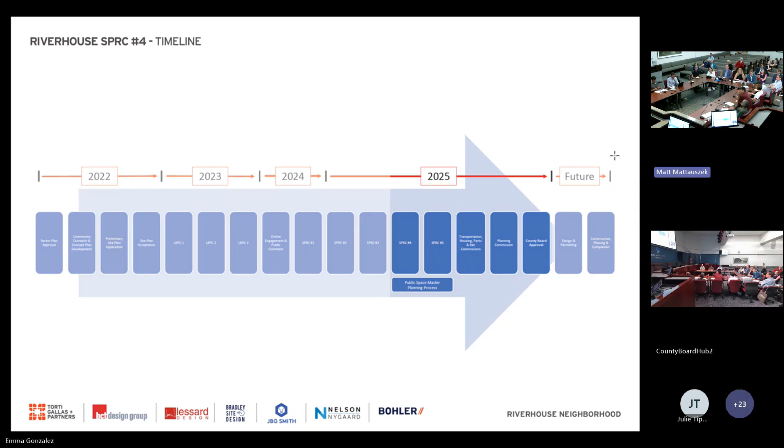My name is Kedrick Whitmore, and we're excited to bring you our proposal for the RiverHouse neighborhood. You'll see an overview of the topics we'll discuss this evening. We've been at this for quite some time since the adoption of the sector plan back in 2022.

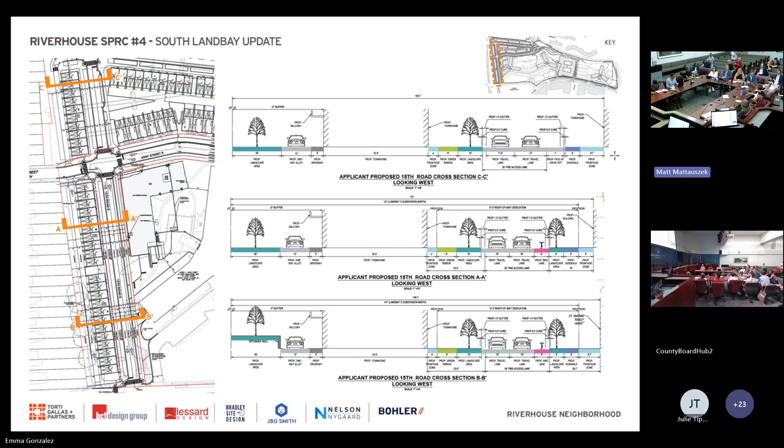The next slide is the C1 building. We heard comments at the last meeting that the architecture needed more variety and a better definition of the base, middle, and top of the building. In response, we've made revisions to the architecture, including refinement of the parapets and changes to materials and colors to help set off the base, middle, and top areas.

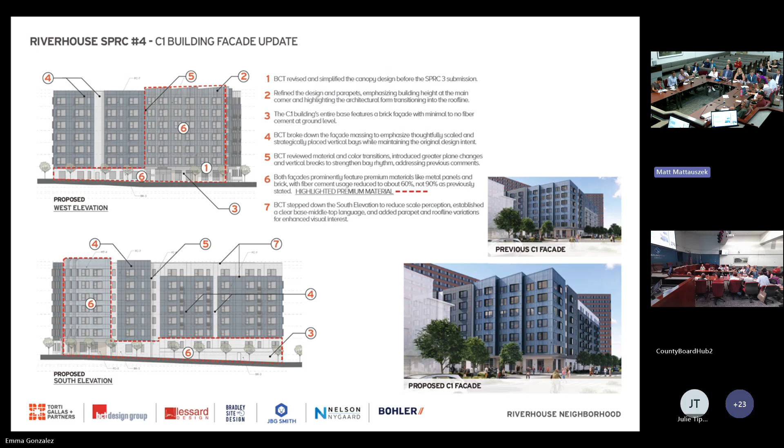On the right side, the top shows the previous facade, and the bottom shows the new proposed facade. We've outlined the changes here, 1 through 7. I won't go through them in detail now, but we're happy with how these revisions have really helped the building. With that, I'll turn it over to Belle to discuss the green ribbon.

Thank you, Ked. I am Belle St. John Day, and tonight I'll speak on the green network design found throughout RiverHouse, focusing on the green ribbon and open space. You can see the map presented in the Pentagon City Sector Plan showing the flexible placement of the green ribbon with key connections noted in the gray boxes.

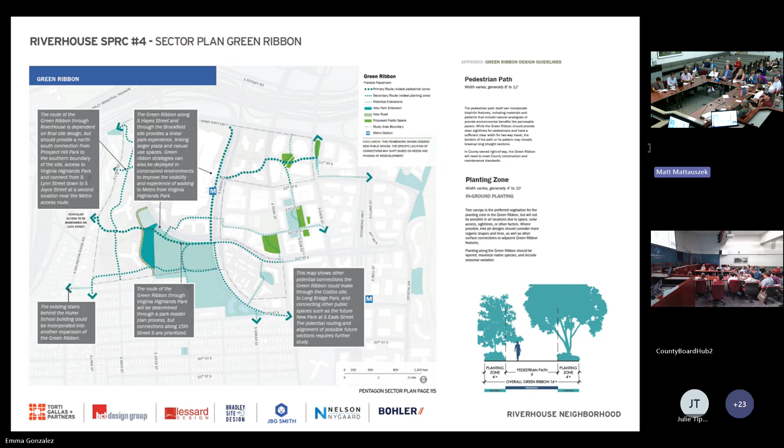More than 3 miles of new walks is diagrammatically shown, with approximately 1 mile of new paths indicated for the RiverHouse site. The design team created the section shown as a visual of the standard green ribbon profile as directed by the guidelines, with a typical overall width of 16 feet and a clear path ranging from 8 to 12 feet.

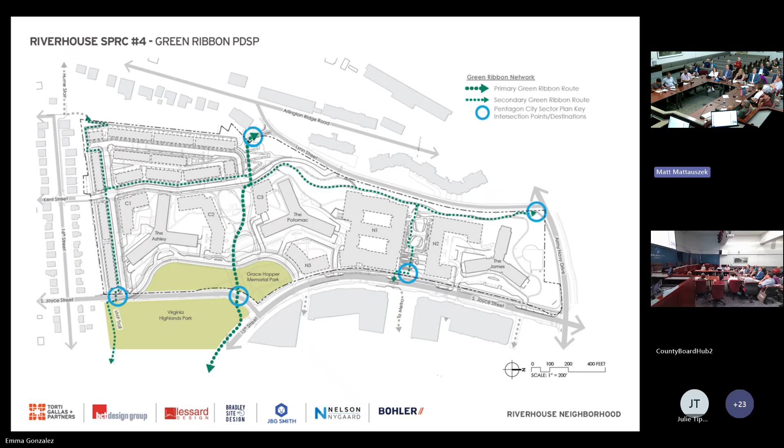Next you can see a diagram showing the full future RiverHouse green ribbon network, with key intersections and destinations from the previous map highlighted using blue circles. The placements have been adjusted per coordination and feedback heard thus far, along with utilizing creative solutions to provide ADA accessibility across the RiverHouse neighborhood. The design intent is to create clear connections to nature and native plant corridors through an inviting and safe experience.

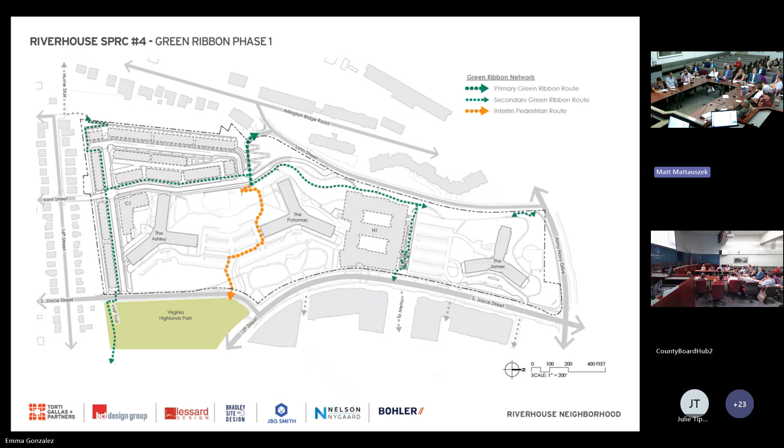Due to the size of the site and the significant length of green ribbon provided throughout the RiverHouse site, there are several typologies found. Starting at the south end of the site, you can see the secondary green ribbon placement along the front of the townhouses. This is on the new Fifth Road looking west.

The alignment along the townhouses provides a variable width path and tree planting strip to provide the organic form as described by the green ribbon design guidelines. Opportunities for path lighting and casual seating will be accommodated with the variation in widths.

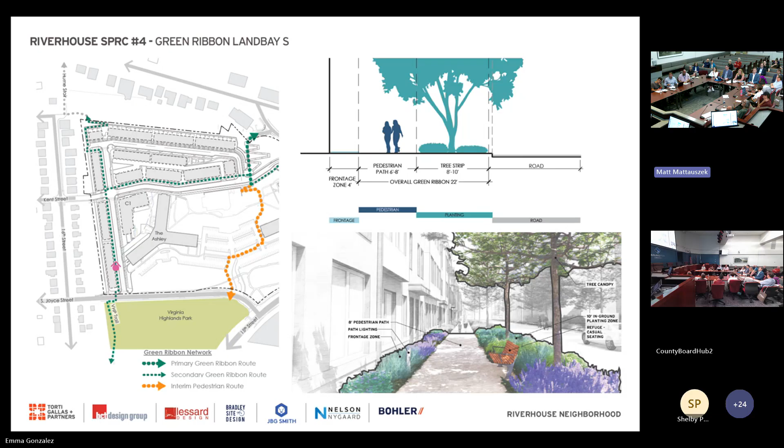This is a similar condition found along Kent Street, which currently shows 14 benches spaced throughout the length, and this will have a similar dimension. Periodic breaks in the bioretention planting are also included to meet the needs of access to the street.

On the next slide you can see the condition of the primary green ribbon at the 15th Street spur, where the 28 feet of grade change is accommodated with a wide staircase. The biophilic principles of the green ribbon are also met by splaying the accessible access ramp to nestle within native plantings and work with preserved tree canopy.

Landings provide opportunities to capture the view towards Virginia Highlands Park. We have been exploring the additional 22 feet of grade change up to the intersection of South Lynn Street, but the ADA solution would not meet the principles of the green ribbon per the sector plan.

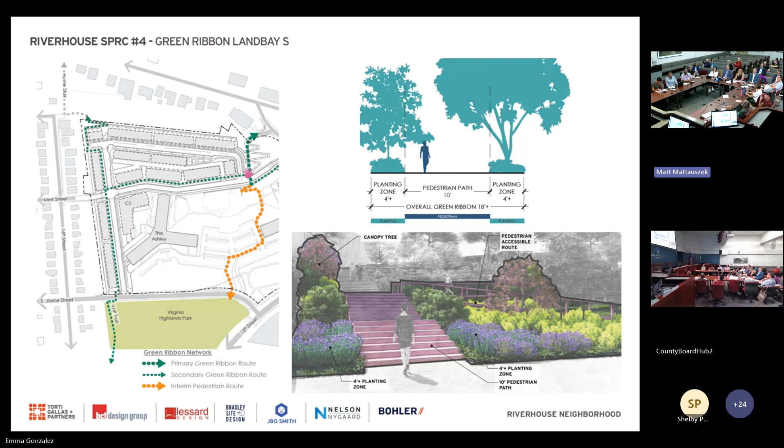The next slide shows a plan view of the interim condition, met by utilizing existing pathways and creating or enhancing existing pathways where possible to provide the full 8-foot width and accessibility.

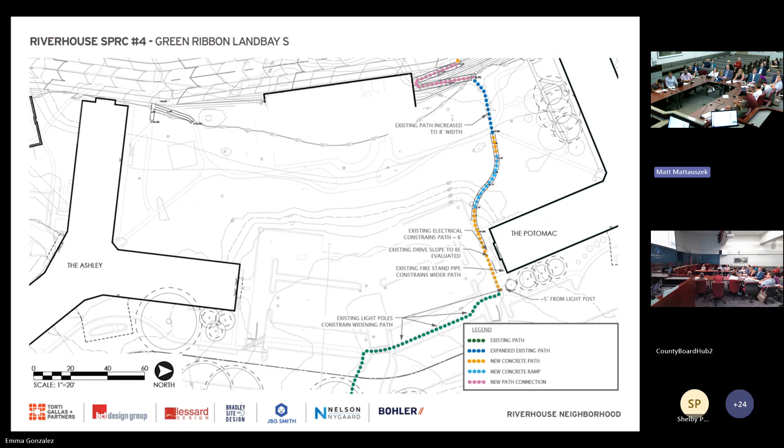As we go to the next slide, we move farther north into the site to explore the green ribbon typologies found in that area. This example at the N1 interim space is subject to the park master plan process beginning shortly, showing a 35-foot dimension for the green ribbon.

With the 35 feet of dimension in the space, the green ribbon can be easily accommodated in the first phase to provide clear access, plantings, casual seating, and wayfinding.

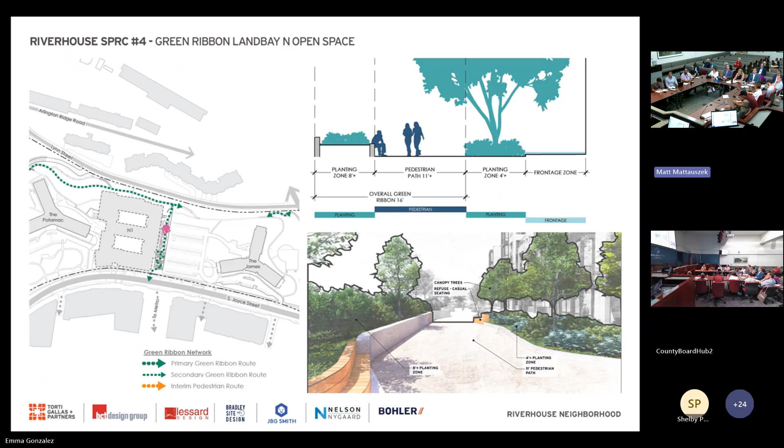Going to the next slide, we are along the west property line looking south next to the N1 building, with South Lynn to the right.

The green ribbon pathway responds to the existing naturalized condition in this area with a native plant palette, utilizing walls and freestanding benches for casual seating opportunities, with pathway alignment organically laid out to preserve trees.

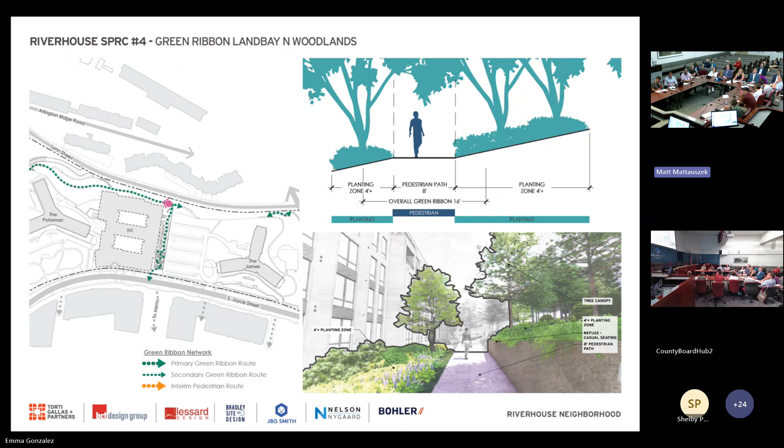The next slide shows how the green ribbon responds to tree preservation, surfacing when the naturalized setting becomes more dense with existing trees to remain and extensive topography.

This view is looking south again along the green ribbon near South Lynn Street at the corner of the new N1 building, looking behind the Potomac. You can also see a bit of the access up to South Lynn for the bus stop on the right side of the screen.

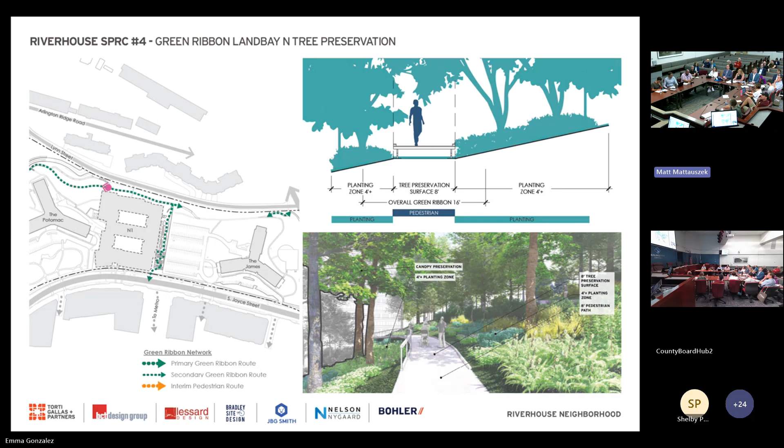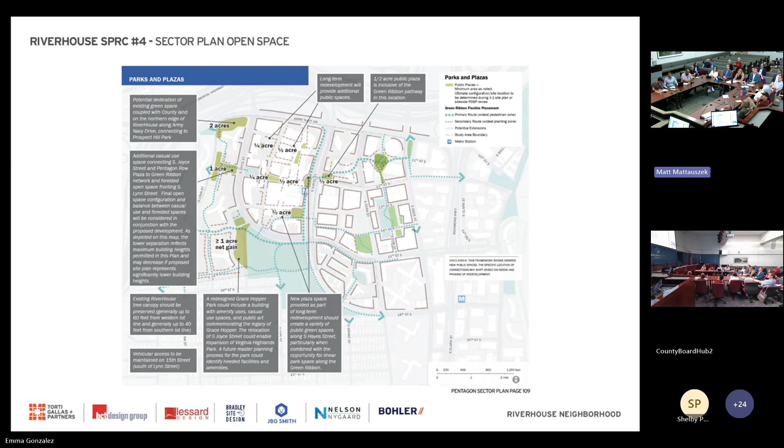Now we're going to shift into the open space designated for the RiverHouse neighborhood. On the next slide, you can see the diagram indicating the 4+ acres prescribed for RiverHouse by the Pentagon sector plan, the city sector plan.

The next slide shows how the full RiverHouse green network is being planned for, with both the PDSP planned open spaces and utilizing the green ribbon to connect them. The following slide focuses on phase 1, with the delivery of nearly 75% of the green ribbon planned for the RiverHouse site and the interim condition found at N1.

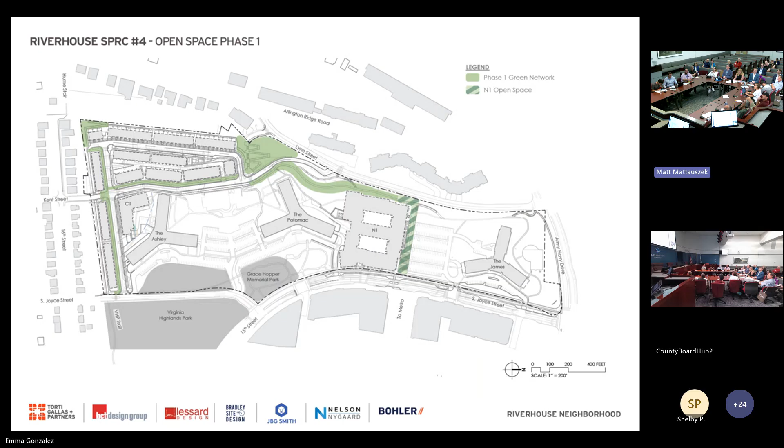We zoom in on the next slide to the conceptual plan showing the interim condition that will be built with N1. Priority was given to the creation of the green ribbon in the first phase, accessed through a universal design approach. The individual dooryards with associated circulation for the N1 residents are outside of the dedicated open space dimension.

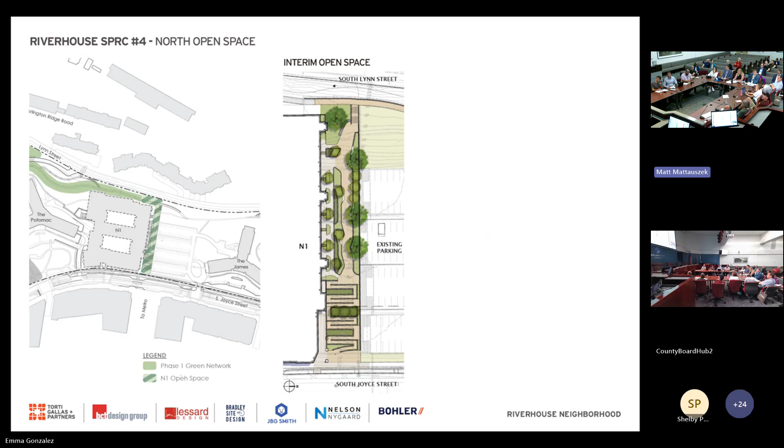This increases activation and a sense of community that can benefit the open space. Seating opportunities are woven throughout to promote rest, safety, and casual social interaction. This view is shown at the top of the stairs from the west, looking east towards West Post.

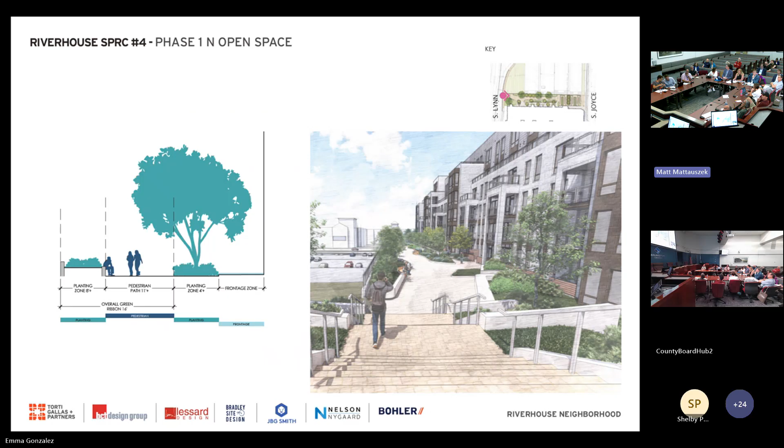Sightlines and view sheds are carefully considered for safety and orientation. Dooryards are areas that activate the space and support CPTED principles by keeping eyes on the space 24 hours. On the next slide, you can see the prescriptions laid out for the RiverHouse site for open space and green ribbon and how we are meeting those.

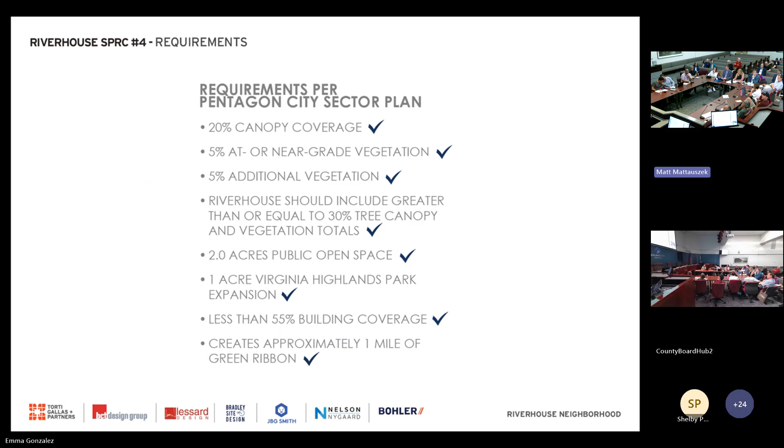I now welcome Chris to discuss transportation.

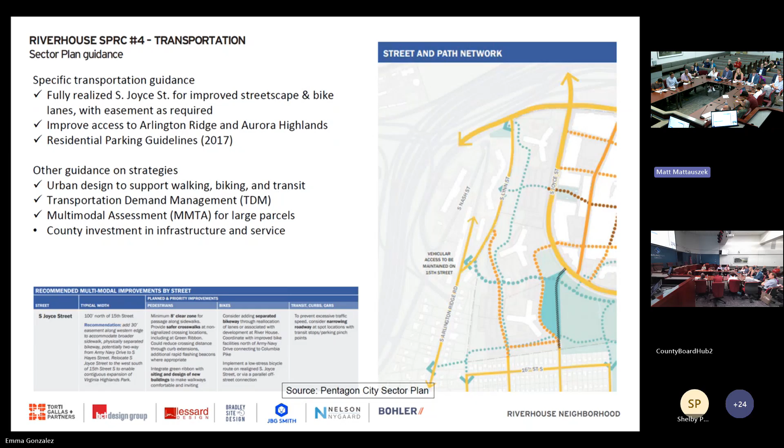Thank you, Belle. So tonight we'll be talking about some of the transportation design elements of the proposed RiverHouse neighborhood. Here you see sector plan excerpts from the Pentagon City sector plan at the right and at the bottom. Highlights include changes to Joyce Street that we're about to discuss in more detail, other multimodal infrastructure improvements, and more typical requirements for analysis and TDM.

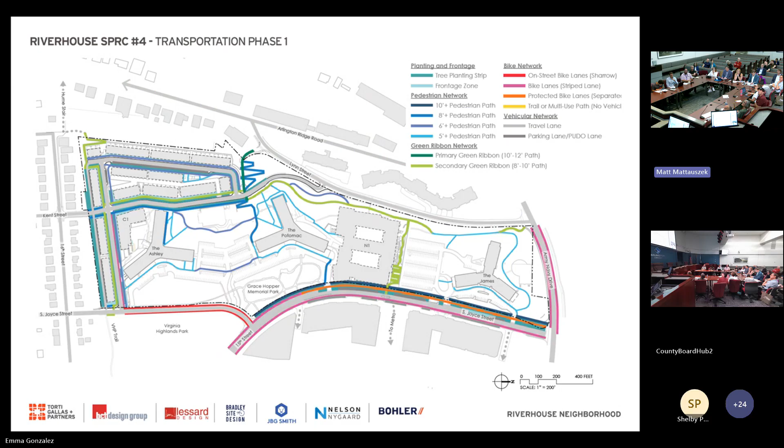It's the same elements as on the previous slide, but noting some of the interim improvements that Belle described as well. So on the next slide, you see the familiar Land Bay S view, which also includes transportation improvements to be delivered with site plan C1.

Belle talked about the green ribbon and to some extent the streets, but I want to highlight the formalized connections both to Kent Street on the south and Lynn Street on the west, which were encouragements of the sector plan.

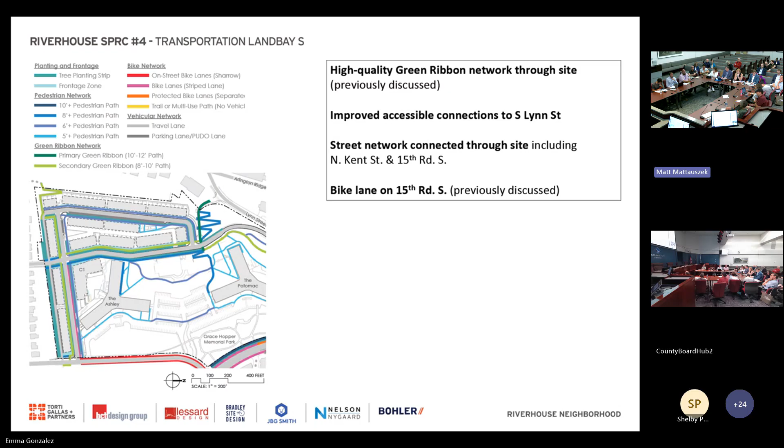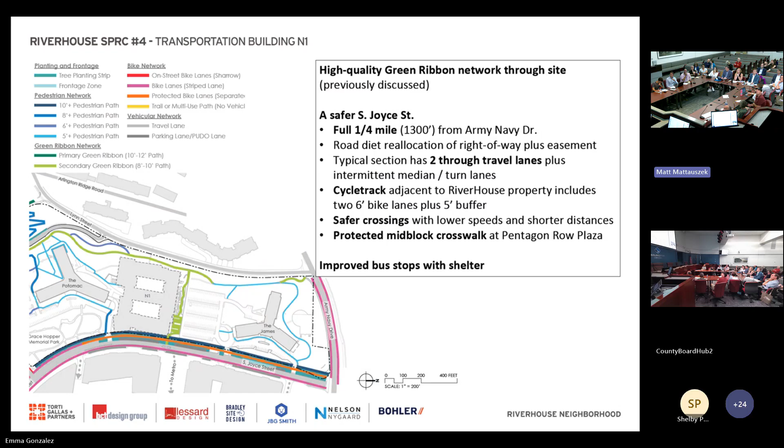On the next slide, we shift to building N1. The focus here is really on the transformation of Joyce Street. Site plan N1 delivers over a quarter mile of road diet on Joyce Street, including new protected cycle track, safer crossings due to lower vehicle speeds, and much shorter crossing distances.

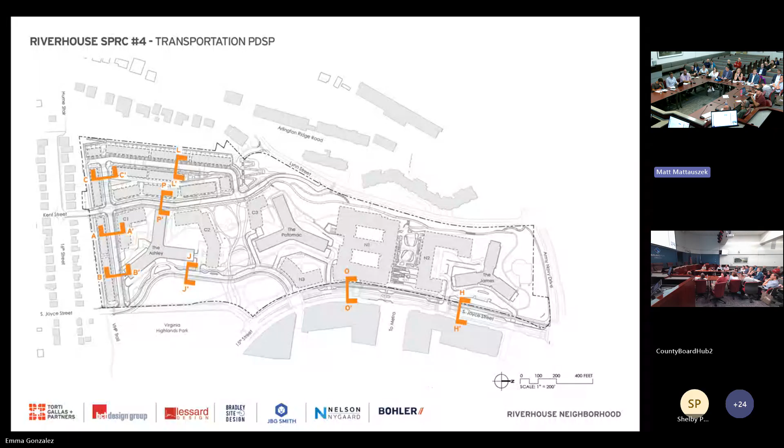Starting with the next slide, we will be walking through some cross-section views of specific streets, starting at the bottom right of this diagram, which is Joyce Street, and then proceeding around to the left of this diagram.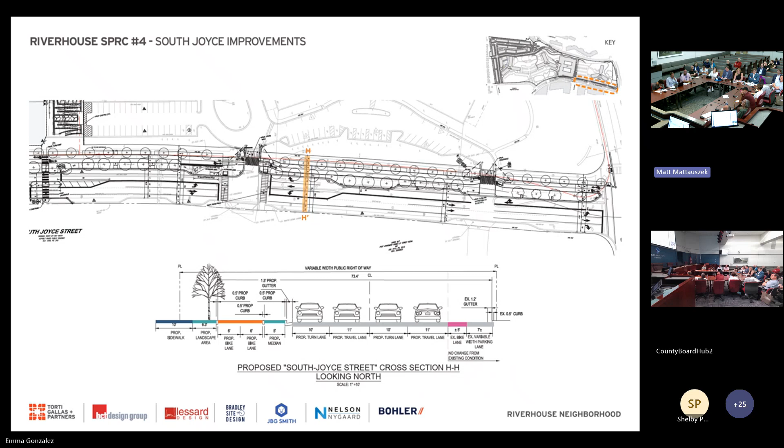The next picture is closer up to Army-Navy Drive. Again, from right to left in the section at the bottom, you see the existing parking and painted bike lane against the Westpost side, plus 1 travel lane heading north. In this particular segment, we have 3 travel lanes heading south, allowing for left and right turns, and then a buffer again before the 2-way cycle track, and finally the sidewalk in front of the existing RiverHouse building.

The next slide shows the relocated Little Joyce Street, as we call it, the segment of Joyce south of 15th Street, which is an element not of phase 1, but of the full PDSP. From right to left across the section, you see the expanded park space and then the proposed shared use path of ample width to accommodate people biking who choose to bike on the path, as well as people walking. Green elements, 1 vehicle travel lane in each direction. In this particular location adjacent to buildings, a proposed pickup drop-off space, and then green elements and the sidewalk against the building.

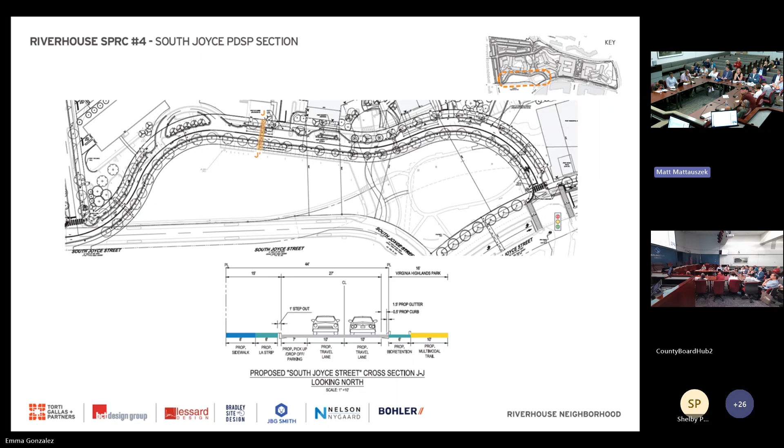The next slide shows even more information on one slide. This is 3 different sections along the proposed new 15th Road. Belle already talked about these at some length, but I'll just point out that in general, they contain 1 vehicle travel lane in each direction, plus in the 2 sections east of New Kent Street, a bike lane, and then on both sides, green elements and sidewalks.

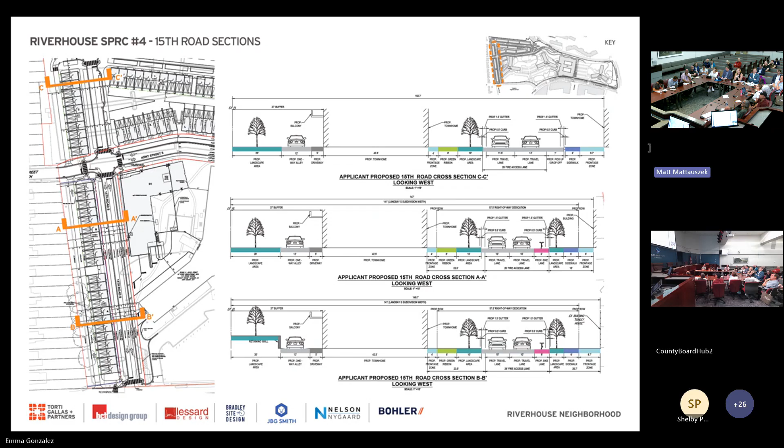On the next slide, you see the new Kent Street, so heading south on the left and north on the right.

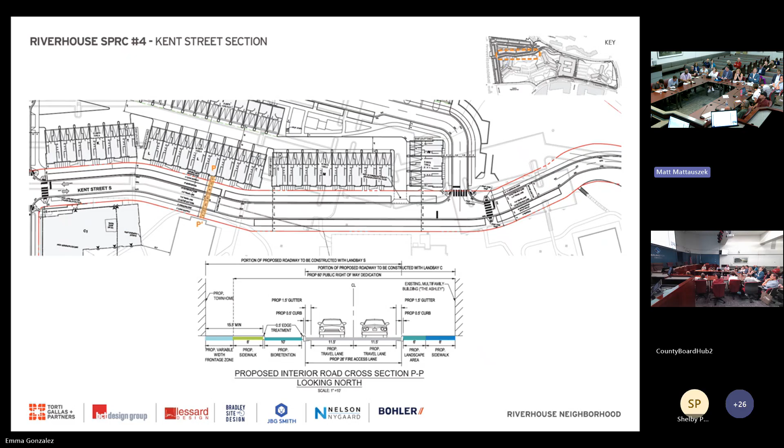It also has one travel lane in each direction, plus green elements and sidewalks. The Loop Road, in the far southwestern corner of the site, is also proposed to have one vehicle lane in each direction, parking along one side, and green elements and sidewalks.

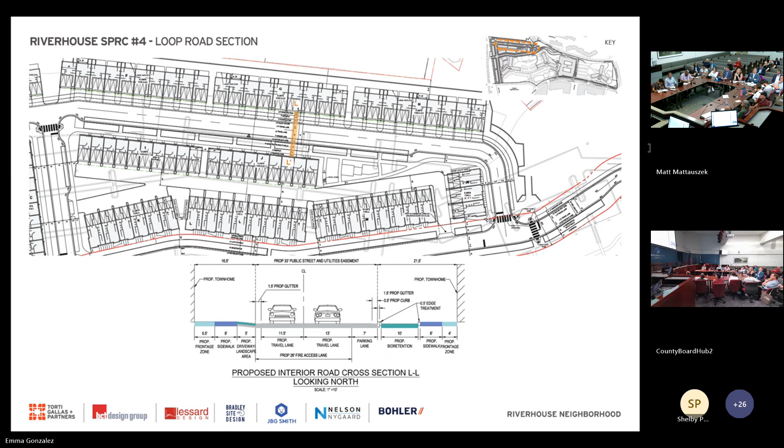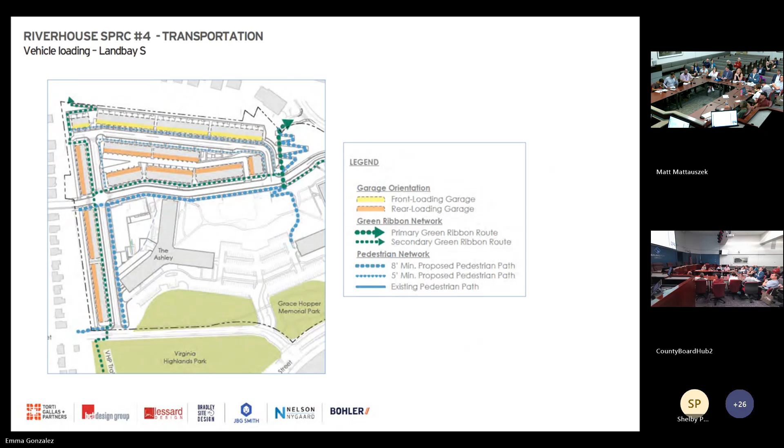The next slide shows parking and loading for Landbay S, highlighting where the garage entrances are for the proposed townhomes. You see mostly rear loading garages, except for the far southwestern corner, where due to topography they're front loading garages.

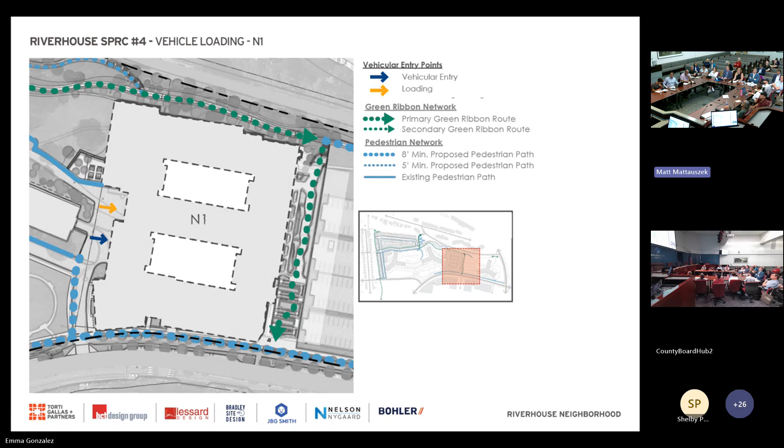On the next slide for building N1, similarly, the access drive comes off of Joyce Street and then provides access first to the vehicle garage in building N1, and then the truck loading.

In summary, phase one includes the delivery of nearly 3 acres of transformed Joyce Street with the road diet described, which is actually more than the building footprint of building N1 itself. That includes 1,500 feet of bidirectional two-way cycle track. Phase one is also delivering over 3/4 of a mile of green ribbon, which is over 1.5 acres of green ribbon space. I believe that concludes our presentation.

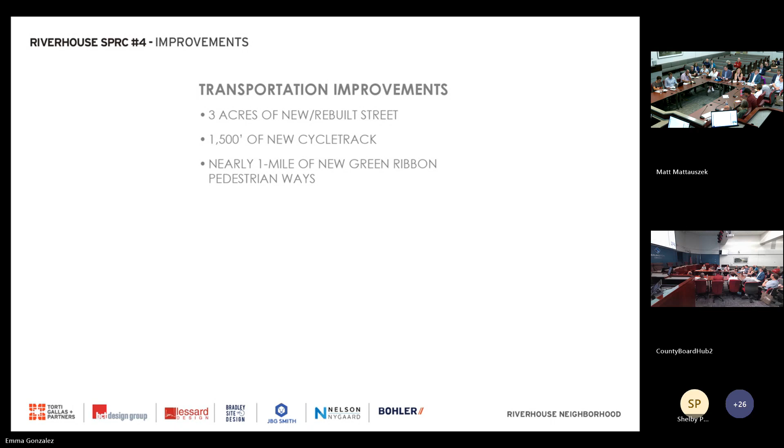While that loads up, I want to focus tonight's discussion on our three agenda topics. The first is landscaping and biophilia. The second is the green ribbon and how it all flows with the site together, whether it achieves the goals outlined in the plan. Third, we will talk about the streets and streetscapes. Those are the bounds for what we'll primarily be talking about tonight.

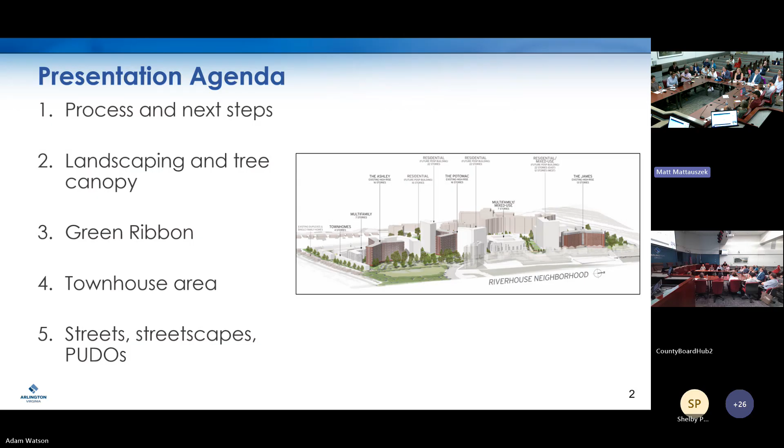I think Kedrick covered the process well at the start of their presentation. We are here on June 26th, this is our SPRC number 4 meeting. We plan to have one more SPRC meeting advertised for July 28th, so please make sure that's on your calendar. We'll send out more reminders before that meeting occurs. We'll be back here again in the county board room for that meeting, and online as well on Microsoft Teams.

As Kedrick also mentioned, we are planning to launch a public spaces master plan process for the N1 public space. That process will focus on the design of both the interim and final configuration of that public space between those two buildings. For tonight's discussion, please direct your comments to that online engagement for that space. We anticipate it will open on June 30th and run through July 20th. However, everybody on the SPRC roster or who already follows the RiverHouse project through our GovDelivery notices will get a notification when that process goes live, and there will be a project page for that as well.

Just a side note that the other two public spaces proposed to come with the RiverHouse PDSP overall will be planned via separate processes in the future. James Park, on the far north side of the site up by Army Navy Drive, would be planned through a similar process when we go through SPRC for the N2 building. And there's already CIP funding for Virginia Highlands Park planning in the CIP, beginning in 2032.

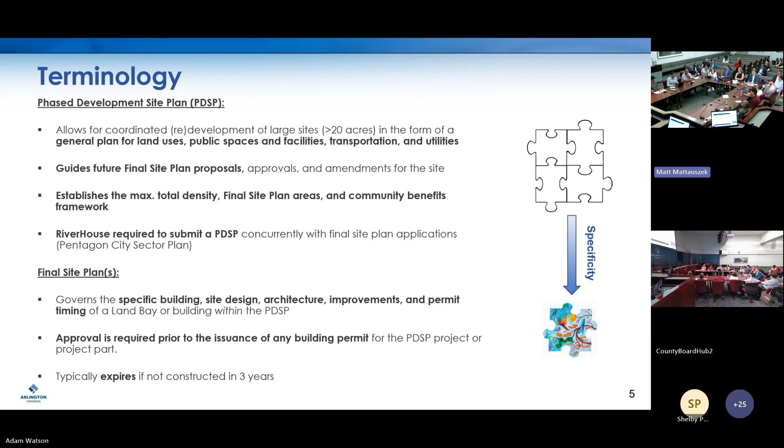It covers what the permit timing will be for when things are delivered for a land bay or building within the PDSP. Approval of the final site plan is required before the county can issue any building permit for the PDSP project or any project part. Typically these final site plans also expire in 3 years' time, unless there's a request to the county board to extend it, or the Virginia General Assembly extends the validity.

Now I'm going to turn to talking about landscaping and tree canopy. There are two major objective criteria in the Pentagon City Sector Plan that cover this topic.

The first is building coverage, shown on the left-hand side of the screen. The sector plan recommends that buildings take up no more than 55% of the overall PDSP site area from the 5th floor and below, and 40% above the 5th floor. This is exclusive of any area granted as a public access easement or fee-dedicated park—so you net out the green ribbon, for instance, entirely.

I'm pleased to say the proposal is well within these thresholds: 47% building coverage for the 5th floor and below, and 34% above the 5th floor.

Pivoting to the box on the right-hand side—tree canopy. There's additive criteria here for the RiverHouse site: at least 20% tree canopy on site, 5% at or near grade vegetation, and an additional 5% additional vegetation, which could be things like green roofs, getting you to a total of at least 30% tree canopy and vegetation on site, again exclusive of fee-dedicated park or public spaces.

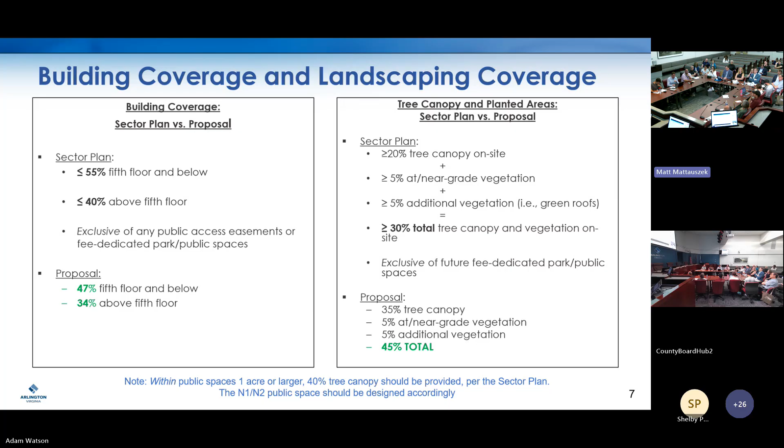The note at the bottom of the screen is something for everybody to think about when filling out the online engagement for the N1, N2 public space. The sector plan has a separate recommendation to try to achieve 40% tree canopy within these public spaces—keep that in mind as you fill out your online engagement feedback form.

Okay, so lastly, the sector plan talks about site edges and tree canopy zones around the site. It recommends that tree canopy should be preserved generally up to 60 feet from the western lot line and up to 40 feet from the southern lot line.

My big caveat on the 40-foot thing along the southern lot line is that the sector plan wants a 40-foot tree canopy buffer, development, a new street, and a green ribbon. I think we're acknowledging tonight that it's probably not possible to fit all of that in, given the existing Ashley building remains on the southern lot line. Knowing that, please bear in mind the flexibility needed for what has to occur in this very small space.

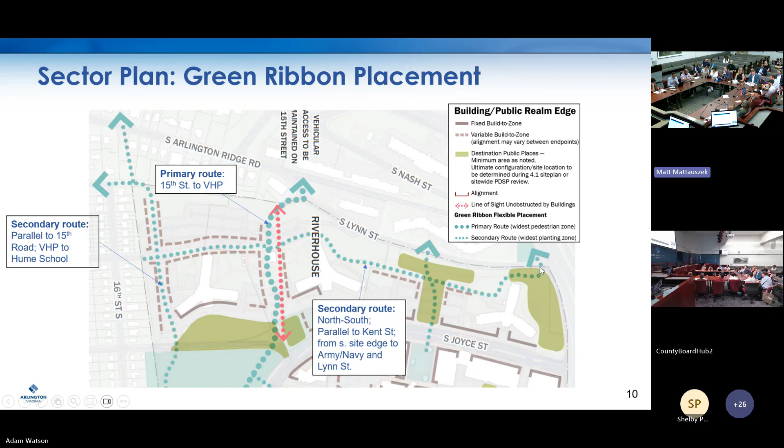The sector plan also has green ribbon design guidelines. I'm quoting the key quote from the cover page of the design guidelines: 'The most important design element of the green ribbon across all sites is the quality and the continuity of the connection, ensuring sight lines, the pathway, and the experience are continuous, easy to navigate, and visible.' It goes into much further detail on things like pedestrian path widths, planting zones, branding and wayfinding, tree canopy, planters, vertical elements, furnishings and refuges, and also lighting.

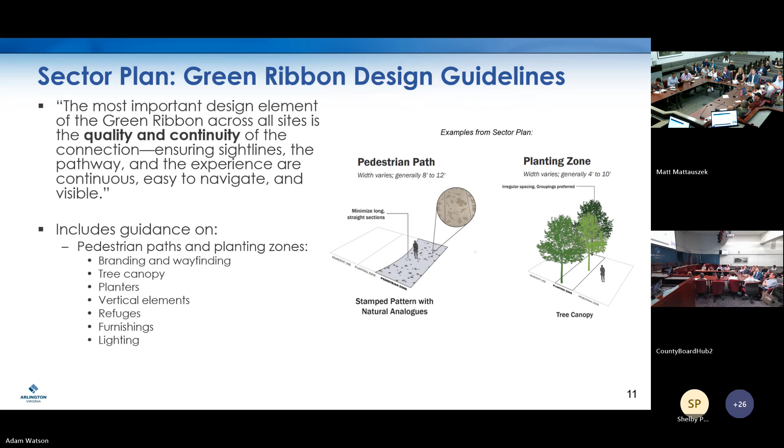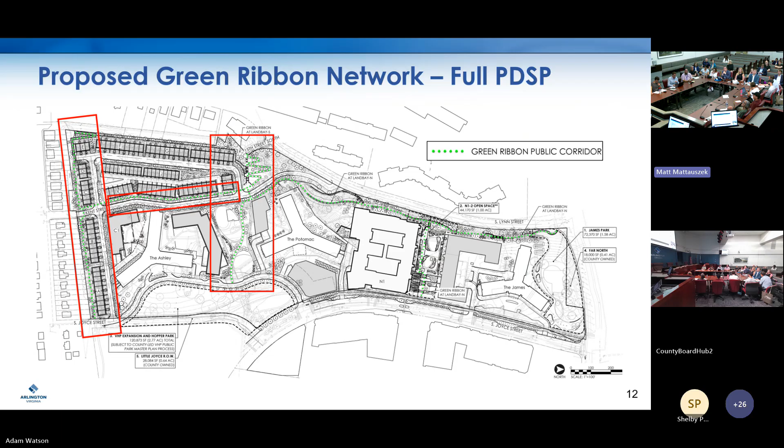So this is essentially the guidelines and criteria against which staff is evaluating the developer's proposal for the green ribbon. This is their overall green ribbon network. I think they did a great job walking through this. I'm just going to focus on a couple areas where I've drawn boxes overlaid on this map. Again, the first one is our primary green ribbon route that runs from the 15th Street spur down to Virginia Highlands Park.

As Kedrick and Bell mentioned, there will be an interim treatment of this routing in this segment of the green ribbon until either the C2 or the C3 building is constructed, whichever comes first. We've been working with them to make sure there's a way in the interim to get you from Kent Street down to Virginia Highlands Park. This interim path includes both new and existing sidewalks that vary in width from 6 to 8 feet and connect you down to VHP.

One thing that has come up through SPRC in previous meetings, again talking about the primary route, focusing on the segment from Kent Street west to the 15th Street spur — the way the applicant has proposed it, this does comply generally with the sector plan, as it is shown in the sector plan. However, we have heard from the SPRC concerns about the existing grade on the 15th Street spur and how one is going to connect up to it.

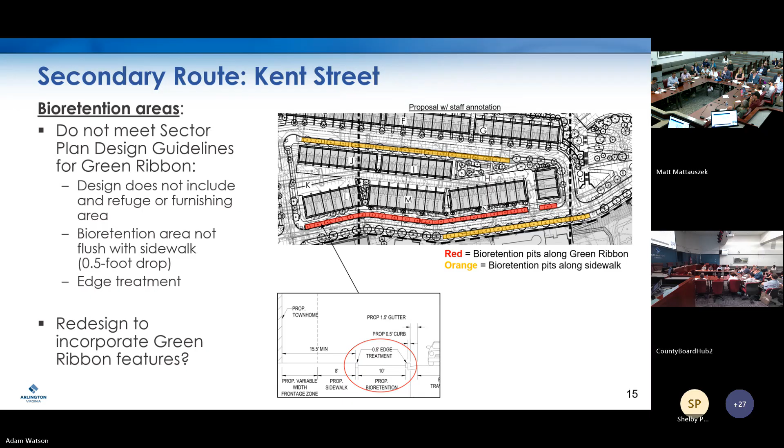Last point on the green ribbon, and this bleeds into transportation and what Rob is going to talk about, is the Southern Townhouses area. This is a slide from last time, illustrating what we're trying to do: have clear, unobstructed sidewalks, standard landscaping strips where we know the trees are going to be healthy and survive, and a publicly visible path with unobstructed sight lines, versus having driveways where you have a number of obstructions.

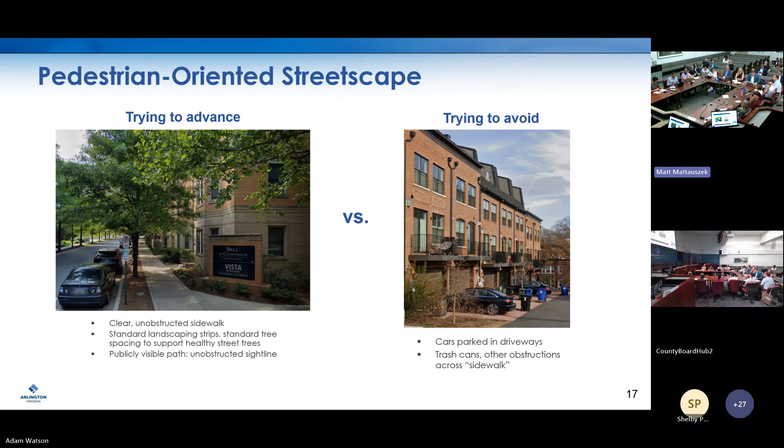We've been working with the applicant closely since the last SPRC to get a new revised design on this, and I think we're really close. We appreciate the applicant's efforts to work with us and redesign this—it's much improved. That being said, there is one area where we think we need to continue to do a little more work.

Making sure that the green ribbon path, again talking about continuity and sightlines, could continue straight to connect to the ramp up to the Hume School, rather than having to take a couple 90-degree turns to get there. We don't want it to be hidden behind townhouses—we'd like to avoid that. We want everybody to know that this is a publicly accessible path and it's visible, you can see it. So this is something we'd like to continue to work with JBG Smith on.

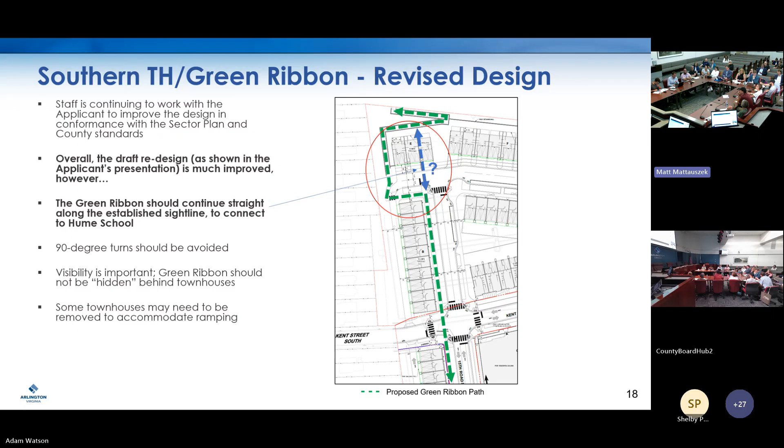Otherwise, we think we've made good progress in terms of trying to accommodate all the things we need down there: the street, the green ribbon, a buffer area, and also having ownership townhouse units. And with that, I'm going to turn it over to Rob Gibson. Thanks, Adam.

Go. Oh, well, that is very washed out.

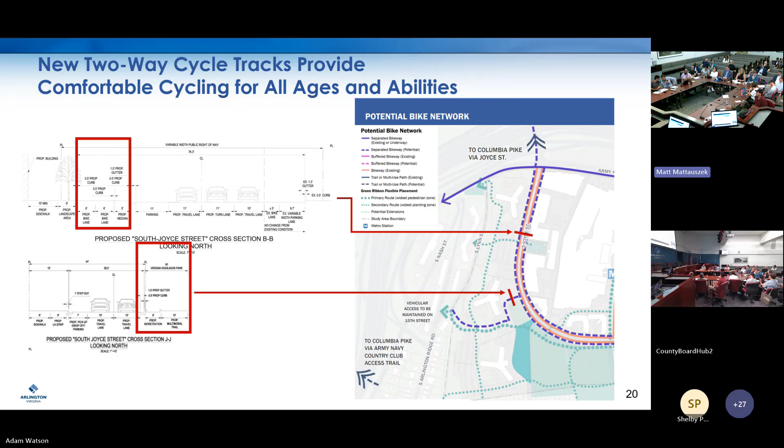So what this slide is showing is that along both the existing Joyce Street segments and along the new relocated Joyce Street segments, the project is proposing separated bike facilities, which the applicant has talked about. This goes towards meeting the goals of the sector plan and our master transportation plan. Both of those are going to provide two-way cycle tracks and a buffer for the street.

One other point we wanted to highlight is that the project is delivering a number of new street segments, a mix of both new public streets and new private streets. The new public streets are going to be the relocated Joyce alignment, the new 15th Road segment up to Kent, and the new Kent Street connection going from Lynn all the way to 15th. In the area where the townhouses are on the west side of the site, we're envisioning a new private street, likely a court name, consistent with the type of use you see there with the townhouses.

Along the new public streets, we'd be looking for the street to be delivered consistent with Arlington County standards. The county would be maintaining the policing and monitoring, the parking regulations, the street lights, and everything therein. On the private streets, the individual townhouse civic association would have maintenance responsibilities. Next.

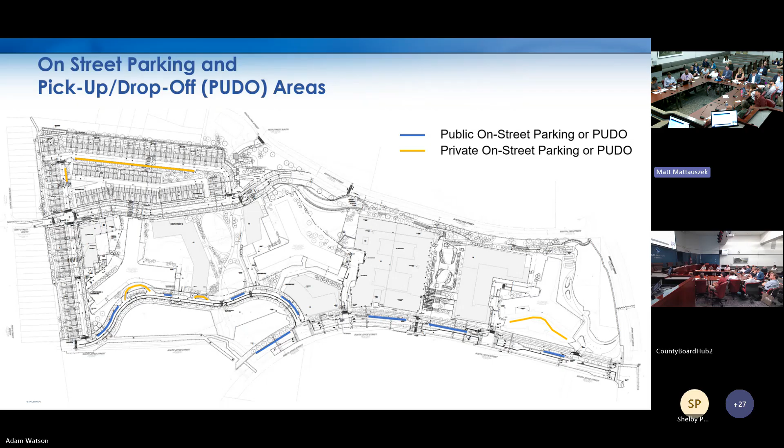One of the issues we're continuing to work on with the applicant is how to deal with this — we may not need on-street parking for the full lengths of 15th and Kent, but we want to accommodate some short-term drop-off and pickup, so we're looking at ways to do that. That's one of the outstanding areas we're continuing to pursue with the applicant.

I'd like to make a programming announcement: we're discussing the transportation elements at a higher level and looking at the street cross sections. The applicant continues to work on a transportation assessment and analysis, which looks at the levels of service for all the intersections and roadway links. That will be presented and discussed.

The applicant is continuing to address staff comments on that and finalize it. We didn't want to have a discussion about that while the applicant is still being responsive to staff — we wanted that information to be daylighted for the community, and it will be available at the next meeting.

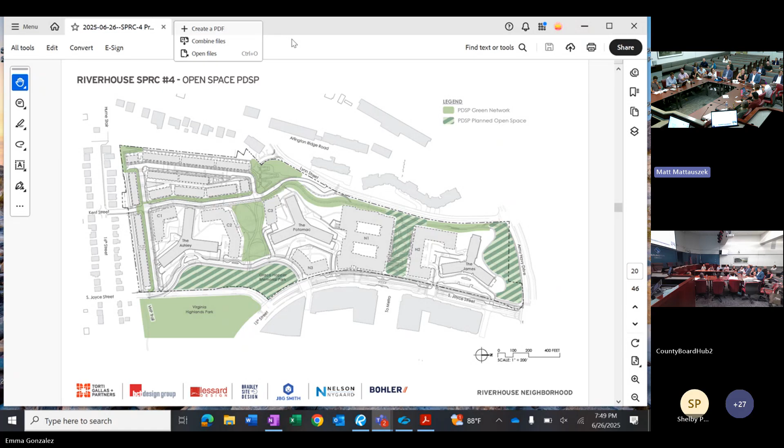Our design aesthetic for the landscaping is a native plant palette held to Arlington County standards—native tree species and native understory selections that really support the native pollinators in our area: birds, insects, other animals on the site. The intent is to create this lush, naturalized setting across RiverHouse, especially with the direction that the green ribbon is supposed to be this biophilic experience. We really want to lean into that, doing a lot of layering, with both understory and supporting canopy overhead, for immersion in nature throughout the site.

And for example, what would you see as an average tree density? How far apart do you expect the trees? That type of thing—I'm trying to get some idea of what it'll look like.

I don't know if this is germane, I just wanted to add to the interesting part Belle said. I'll add the boring part, which is that the county's process is such that we'll have a conceptual landscape plan approved with any site plan that comes forward, but that will continue to evolve into a final landscape plan with a deeper level of review, more specificity in terms of the plantings and their locations. That may be the answer—it comes with the final landscape plan.

Yeah, I think so. There are just a lot of layers of review. We're spacing trees apart to be respectful of their full mature size, so as not to overcrowd in the future, but it's a very dense landscape that is anticipated out there.

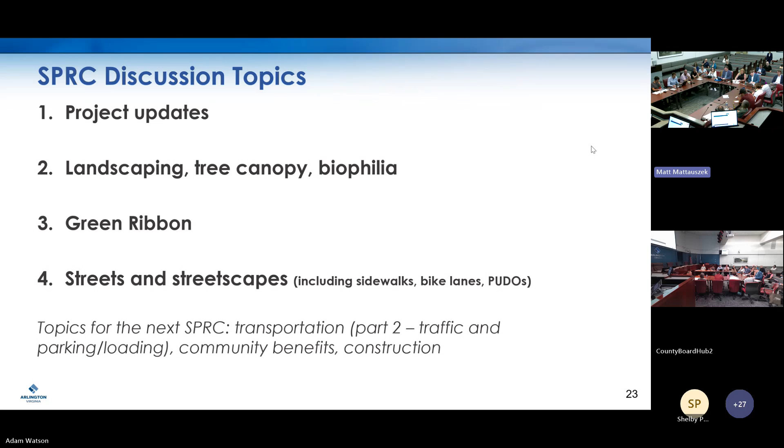So one of the questions I have, on discussion of tree canopy, is in that N1 building—I know we talked about the recommended being 60 feet and the proposed being 49. Obviously there's going to be trees back there, there's going to be a green ribbon. I know from experience walking by some of those areas by the James and the Potomac, that width is of course very small to include everything there and the green ribbon. I wish there was some way that could be expanded. I know it's challenging with the building footprint, but I wanted to ask if that was a reasonable option. We could take a look at that.

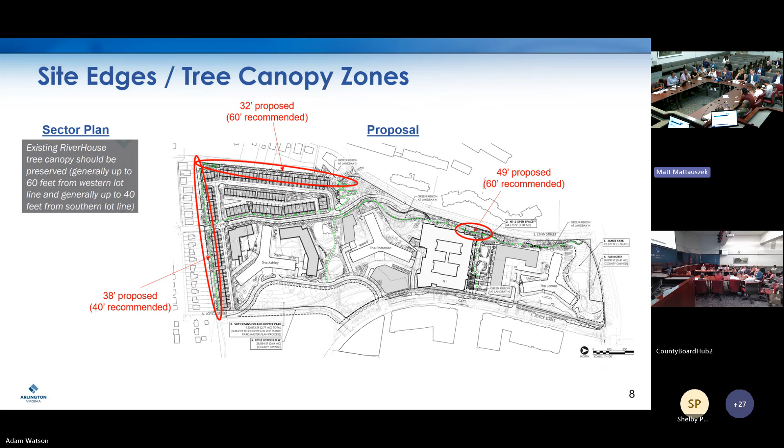Second question: when will there be a process for the interim area between N1 and N2? Are you referring to the open space between N1 and N2? Yeah, staff mentioned that the larger open space survey would go out, but I'm curious if there will be a public process for that interim space before the whole build out. Staff may want to add, but the process referenced will include both the interim space for N1 as well as that total larger space in the future.

Thank you. I walked this a while ago, looking at the western edge by the townhouses with the 60-foot theoretical buffer, which will be 38. Last time I walked that, coming from Aurora Highlands, there's a street that sort of ends but something continues on—there are power lines, a power line easement with just grass underneath. I think there are houses up on Arlington Ridge Road, and at some point their property line ends, I'm not sure where. But that power line area looks permanent. Is that a private easement the power company has? You can't build under it or have trees under it because those power lines have to be there. Isn't that effectively a buffer, even if it's not part of this property? I don't think the houses up the ridge have property lines going down that far, or if they do, there are clearly restrictions because there's nothing planted there. Could we get information about that? I'm way more comfortable with 38 feet if there's effectively a buffer already along that edge. I'd rather have houses than a buffer when there's already a buffer—that's where I'm coming from.

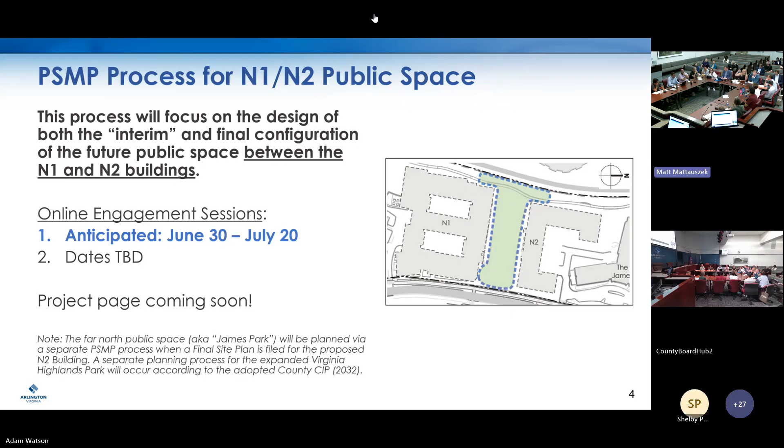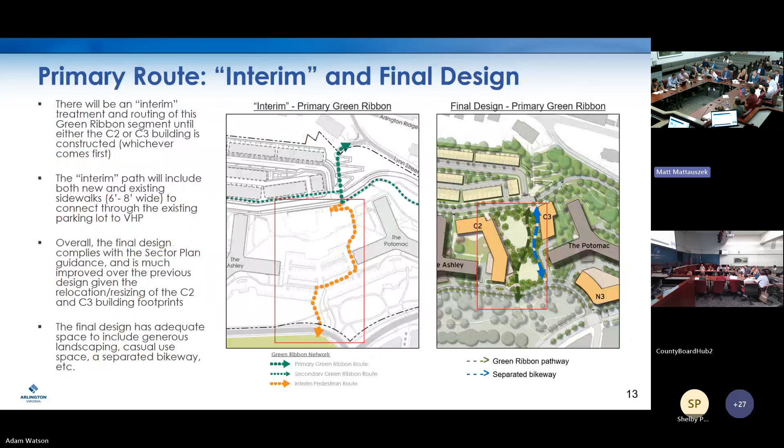So clarification, you're asking about the exploration of connecting up to South Lynn versus the base of the spur. Okay, so we have been studying it. It's an additional 22 feet of grade change. We're already making one grade change of 28 feet from Kent Street up to the base of the spur. The additional 22 feet of grade change takes almost 460 feet of additional ramp. And to accommodate the total 50 feet of grade change would eliminate over 12 healthy trees in that space. It would likely create a sheer wall, and it really starts deviating from the guidance of the sector plan for creating this biophilic experience.

And I'd add, we're really pretty excited about this space and the green elements here. Y'all may remember there was a condo building here at one point, and part of the ask was, hey, can you eliminate that and create some new green and open space that's not necessarily called for in the sector plan, but will be a good amenity and piece of this site.

And I forgot to add, what is the impact on the view sheds? Shifting it, of connecting up? Yeah, no, I think Bell would probably confirm that there would be significant ramping that would impact the view shed if we had to do that.

First question, when you're going through this green ribbon, is there any wayfinding that you're going to have? I know the bid was supposed to be working a long time ago on wayfinding, and how will you know you're on the green ribbon?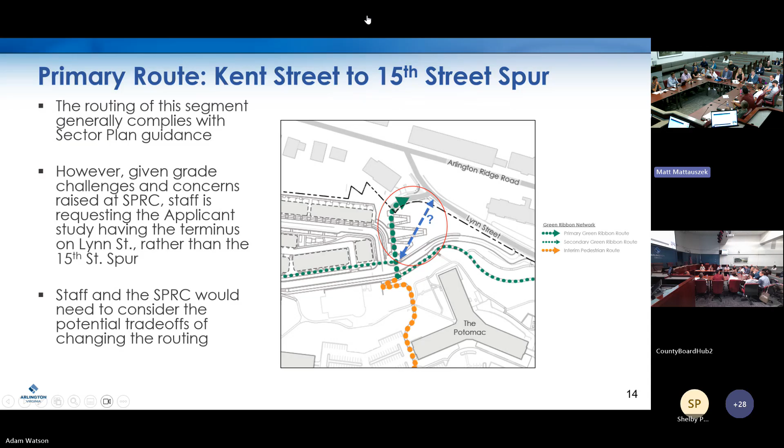So the first way to hopefully know is to have the green ribbon be straight and intuitive, and that's something we're continuing to work with staff on to ensure that's the case throughout. The county sign ordinance does make wayfinding signage very difficult. Freestanding signage is basically prohibited in most cases.

We're going to be continuing to work with JBG Smith on wayfinding, because there are things besides freestanding signage. There's markers in the ground, there's other things that can be done that are recommended in the guidelines. But it's a very good point, and we'll continue to work on it.

I would really suggest that maybe the county waive some regulations to put up some signs that say, here's the green ribbon, here's a map, here's where you are now. Parks have those signs that show you essentially where you are on the map and where you can go. So I'd really think it would be appropriate to have a series of standalone signs at various places to tell people where they are, where they can go, and where the green ribbon is.

100%, staff wants that to be very clear, and we're going to be working on it. I don't know that all the provisions of the sign ordinance apply here, so we're just going to need to work more closely with them. But we absolutely want signage, and we would like wayfinding, whether that's in-ground signs, whatever have you. So we'll continue to work on that. Point well taken, thank you.

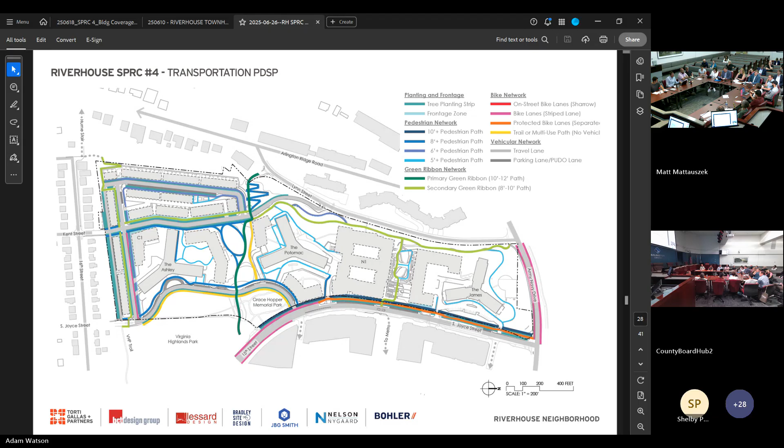Can you hear me? Okay. Yes, I wanted to echo Jeffrey Williams' concern about making Joyce one lane. I don't think that's realistic. It's a major road right now. It leads to the Harris Teeter, but it leads to all of Westpost, and it backs up. It's 2 lanes on each side, and it backs up right now. So I don't think that would be realistic. So I just wanted to make that comment.

Any others? Okay, yes, I see from public comment, sorry. Anyone else here in the room and online who's a member of the SPRC who'd like to weigh in on this topic?

Well, I'm going to do something a little crazy here. We've got about 5 minutes before I want to start public comment. So if there are any other closing thoughts, questions, okay, I figured it'd be a few. Make them quick, and we can get through a lot of people here. So I saw your hand go up first.